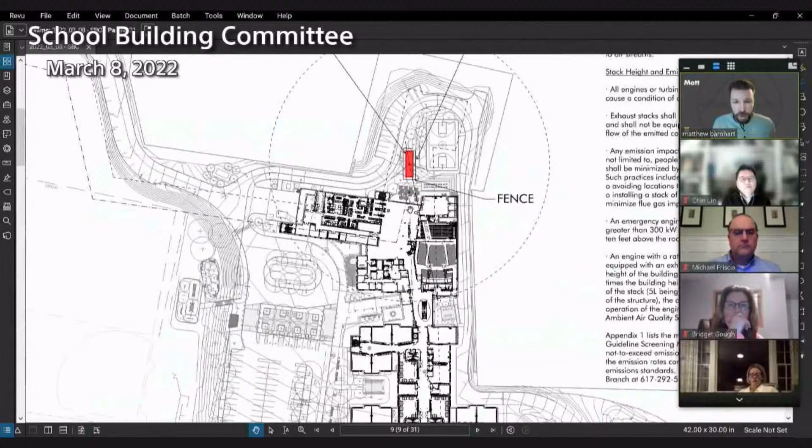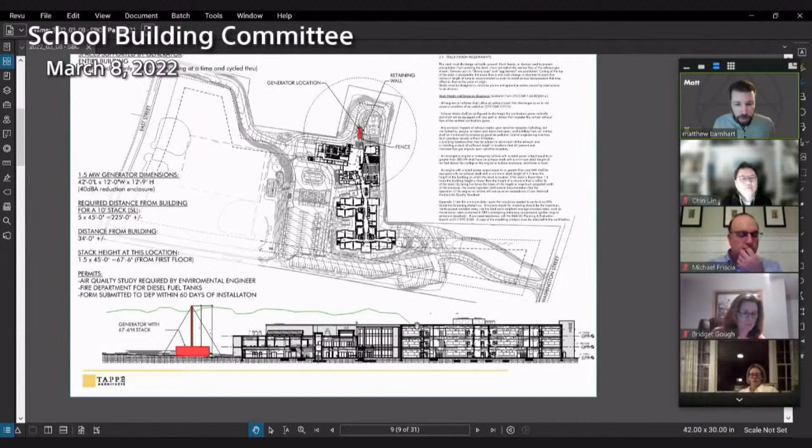As you zoom in back here, we've tucked it in behind the building. We're still working on the design of where this will actually fall, and we're reworking the plan to get this as far back onto the site as possible, so it won't be visible as you're entering the building, with the woods and everything else protecting it. Down here is a site section cutting through the site north to south. You can see the generator size, the stack height, and the tree line height, and how that compares and sits with the rest of the building on the site.

This is another option showing the full generator supporting the whole building. This was another option we showed where, if you needed to maintain the required distance from the building to get only a 10-foot stack on the generator, you'd need to maintain a distance of 225 feet away from the building. This option showed where that would fall on the site, which ended up in the middle of the playing fields at the front of the building, and it wasn't very pleasing when driving down and entering the site to see that generator. So this was one option we decided not to proceed with.

Again, this is the same option, just looking at where else on the site it could go. This is on the Washington Street side—it would be located right off the new main drive into the school. Again, because of the appearance, we didn't really want to see that as you entered the building, so we did not proceed with this option either.

This was a second option we looked at, splitting the generator. It still maintains the whole building on the generator, but we looked at doing 2 smaller generators, because once you go lower than that 1 megawatt, you don't have to meet all the special DEP requirements for the stack and other testing requirements. So we explored that option, but it doubles up—you have 2 generators, and we also have to provide another emergency distribution switchboard for the switchgear, because once you go with 2 smaller generators, it doesn't have all the same equipment built in. So you either need to provide additional space inside the building or outside the building. Based on the additional cost for longer runs and double runs and other factors, we did not proceed with this option either.

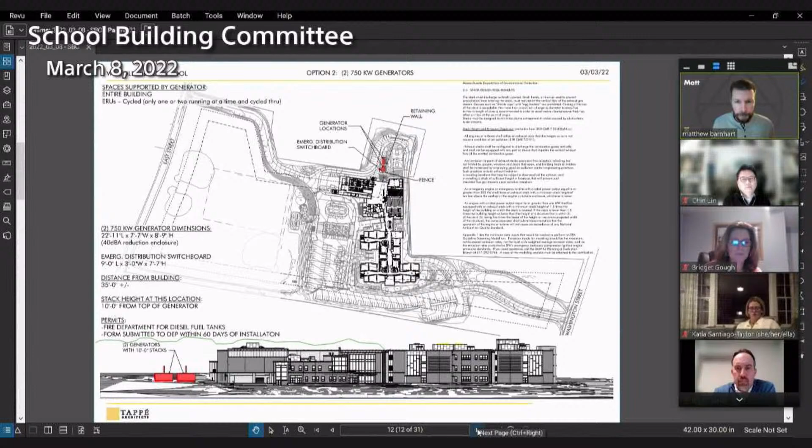Finally, this is the last option that we looked at, and we are proceeding with this option as the deduct alternate for the DD estimate.

This is an option with a much smaller generator, this 600 kilowatt generator, and this is only supporting part of the building. So this would be supporting kind of everything north of the main entry.

So that includes, we have a list of everything up here: the kitchen, north wing lighting, one elevator, the BMS system, the fire pump, IDF closets, the emergency lighting.

It also includes the auditorium, the gym, media center, cafeteria, kitchen, and admin. Everything basically up here to the north, except for the performance equipment inside the auditorium.

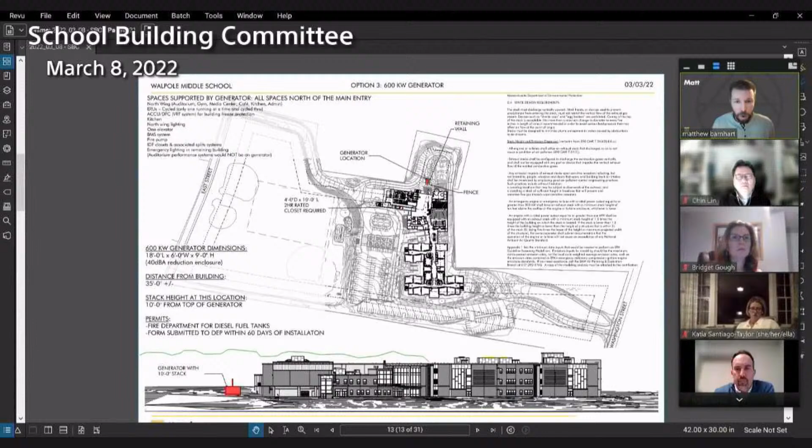And again, this option would require an additional space for the switchgear and everything else inside the building. This is the deduct alternate that we are carrying in the DD estimate set, and this is a much smaller generator with only a 10-foot stack.

Any questions on the generator before we proceed onward? I do. Mr. Conroy. Yeah, okay, I'm gonna roar through them.

First off, I'm gonna sound like a left-wing tree hugger. Do the generators come solar? Not that I'm aware of.

Okay, thank you. Now, next thing, are we powering by diesel or are we powering by natural gas? It'll be diesel. There's no natural gas coming to the building.

So based on our conversation with everybody, there was going to be a premium in order to get that natural gas line onto the site. And since this isn't run on a regular daily basis, there would be much more additional costs for them since they're not making any money back from the town for feeding anything else from the building.

Okay. Now you're making somebody remember to fill the tank, because you're gonna have to run an exercise on a weekly basis, which I see as a problem. But the next step is, building code wise...

What is the minimum we need to make this work? The whole building? For what size generator? What does the code say for a 1.5 megawatt building? Yeah, the 1.5 will power even the last little outlet for a phone.

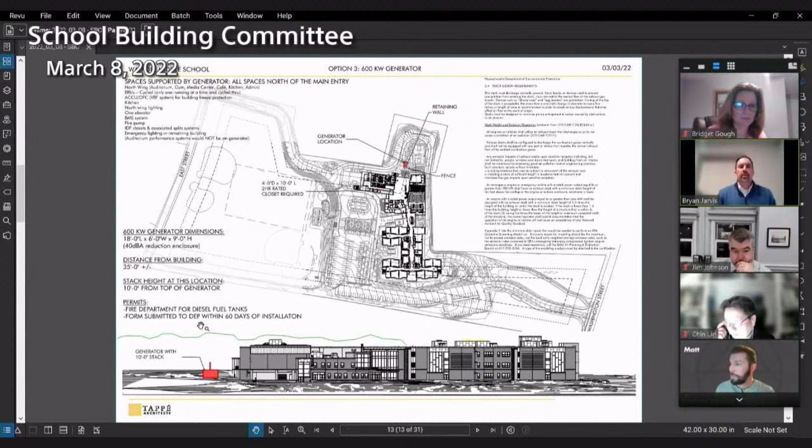Just so you understand, guys, in this business you're more concerned about your base bid than the alternates. Sometimes the alternates don't necessarily reflect the actual costs, so you tend not to focus on them as much as the base bid. But if you're just presenting us a number, that's fine. If this was 'we're going to go with the big generator,' no, I don't think so.

Thank you, Chris and Matt. So tonight is the update on the generator. There are obviously other factors related to the decision besides cost. We should have cost by the first building committee meeting, and we'll have cost by the 22nd and 29th when we actually vote this package. The goal is that the committee can make a decision at either the 22nd or 29th meeting, and then move into construction documents with a decision, because you need to start detailing the infrastructure of the building to accept the generator.

So when would be a drop-dead decision point? I'd say when we go to the DD submission, Bryan, we want this finalized. I think, just like Jack is saying and Bridget's confirmed, this decision is probably going to be made for us when we get the DD estimates back. Everything in the world is so much more expensive, so as part of the VE process, it may just be made. But when we go to the DD submission, we'd want to know for pricing purposes which one we're going with, and from there we can do the detailing and capture that in the construction documents.

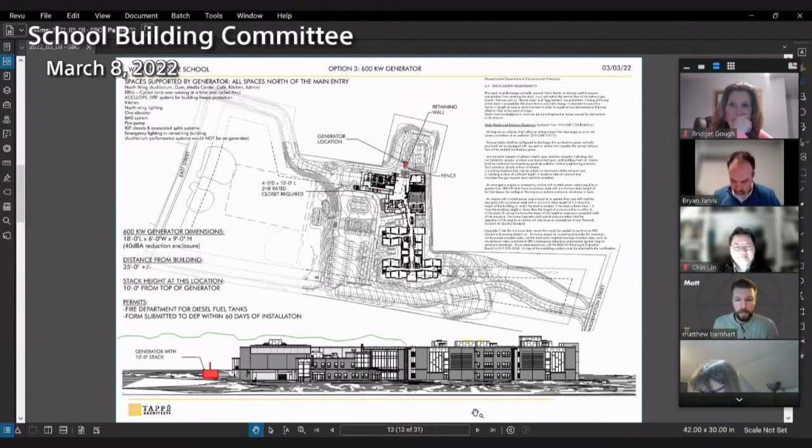So Jack, I'd add, keep the questions coming, because it means lengthier explanations for all of us, and that's important. Thank you, Tappé, you want to continue? Sure, thank you, Mark.

So moving on, we're just going to quickly go through the updated floor plans. There haven't been any major changes, but there's been a couple minor ones we want to show you as we continue to develop. The classroom wings are pretty much the same as we've presented earlier. Typical classrooms, technology, science classrooms are pretty much all the same, just some minor changes as we go through the programming meetings.

And Matt, I'll just point out for folks who maybe are new to the process, in schematic design when we looked at those floor plans, it was kind of just general details as far as the size and shapes of spaces and the adjacencies.

There were some details, but obviously you guys have much more, that next layer of detail on all these drawings. I don't know if you want to talk to that a little bit so folks understand the level of detail the drawings are currently at. Things like dimension of elevations, that type of stuff.

Yes, so as we go through DD and continue on in the CDs, you'll see more details. As Bryan was saying, we'll start getting all the dimensions on the buildings. You'll start seeing much more of the enlarged plans for the different spaces, such as the bathrooms, where we lay out all the tile and the fixtures and provide dimensions. You start seeing all the different details for the different pieces of the buildings, typical corner details, intersection details. We've got the millwork shown, and further on into the documents we've got equipment plans that show all the different pieces of casework, the sizes, the dimensions, and then all those finishes and everything else get put into the specs.

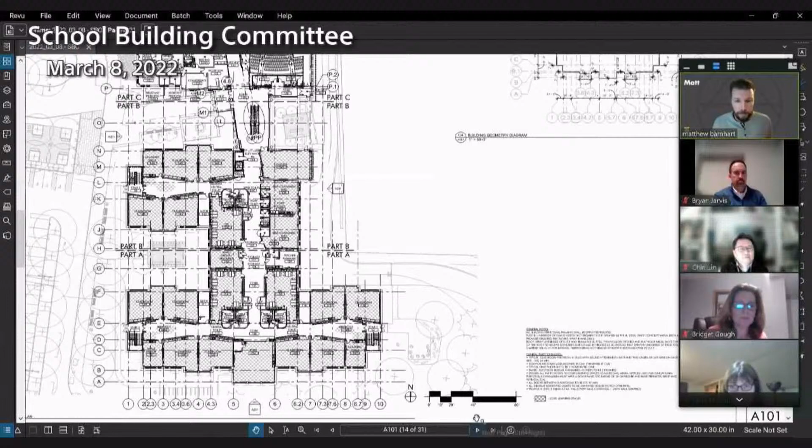Again, we continue to develop the auditorium. We have the seats shown. We just provided more details as we continue along to get coordination not only with our drawings, but also getting all of our consultants' information, making sure everything is clearly coordinated for the ongoing DD estimate set and construction.

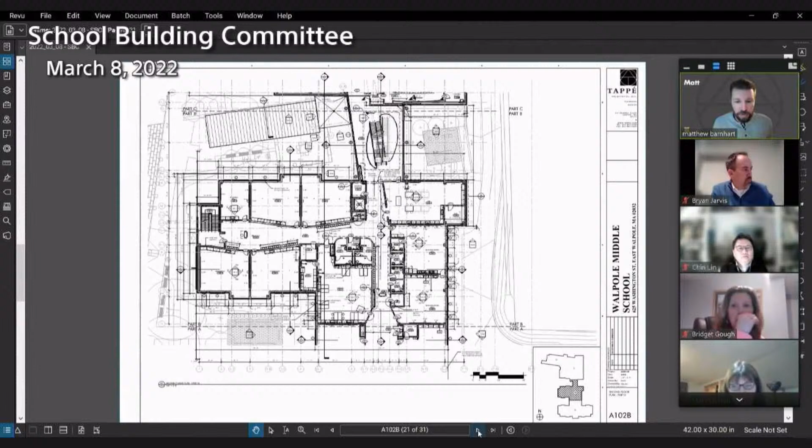This is the second floor. Quickly flipping through these, which is essentially the same as the first floor for all of the classroom spaces, except for the science classrooms. These classrooms on the second and third floor have prep rooms for the older kids. Overall third floor classroom wing. Any questions on the floor plans before we move on?

Okay, we'll continue on to the proprietary items. So Doug touched on this slightly earlier for the technology. We've got the distribution communication system and the data communication system, which are proprietary, so they will tie in and communicate with the other systems throughout the district.

And then the only other items that we have right now for proprietary are for the door hardware. We've got the keying, so it kind of matches the rest of the systems throughout the other schools. Lock sets as well. We've got the exit devices or panic devices on the doors, and then the closers up top will automatically close the doors once they're open. And then also the key access boxes. There is one type that the fire department requires and another type that the police department requires.

So right now, those are all the current proprietary items that we have on the list, and we'll ask you to vote on them. Do we want to do that now, Bryan, or after the presentation is over? I mean, you can do the proprietary items now, and then we'll have to run that through the town process as well.